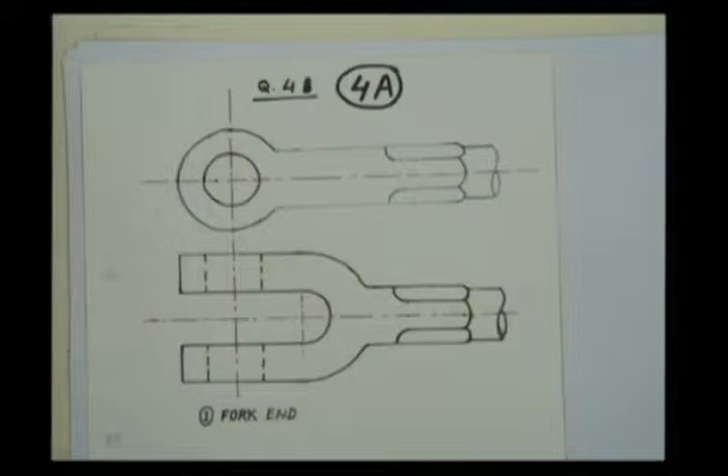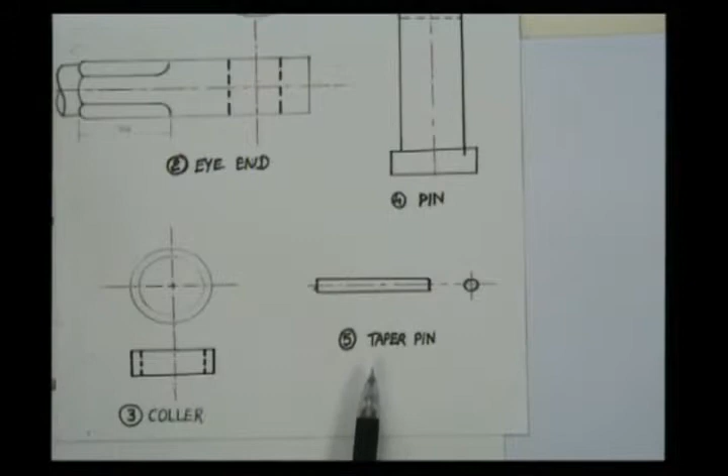...component, and this is the second component, that is the eye end, having two views, top view and front view. The fourth one is the pin, a pin which is inserted to join the fork end and eye end. Two views are there, front view and top view. Then another component is the collar and taper pin. The taper pin is inserted to hold the pin inside to connect the two ends.

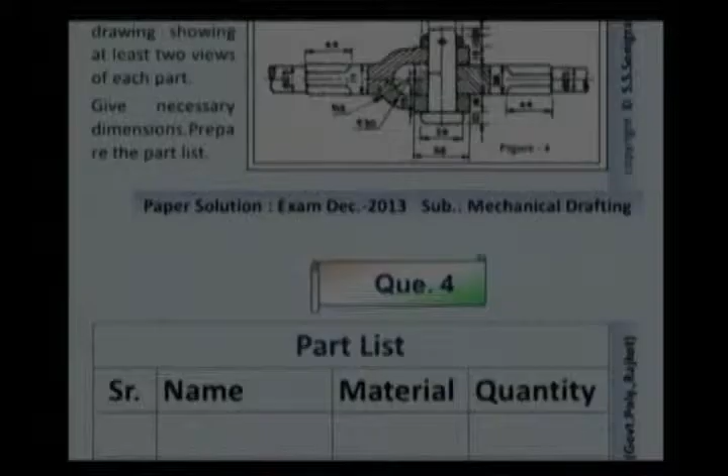So these are the solution. These are views of the given assembly drawing, the details of the assembly drawing. Then it is said that we have to prepare a part list. So prepare a part list like this. First is the serial number, then name, material and quantity.

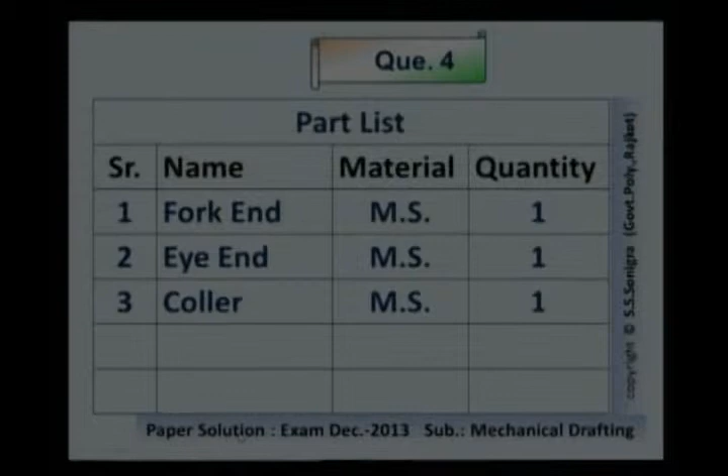The first is a fork end. The material is mild steel or MS and quantity 1. Second is eye end, mild steel, quantity is 1. Third is the collar, mild steel and quantity is 1. Fourth is the pin, MS 1. And fifth one is taper pin, mild steel, having 1 in the quantity. So that is the solution of question number 4.

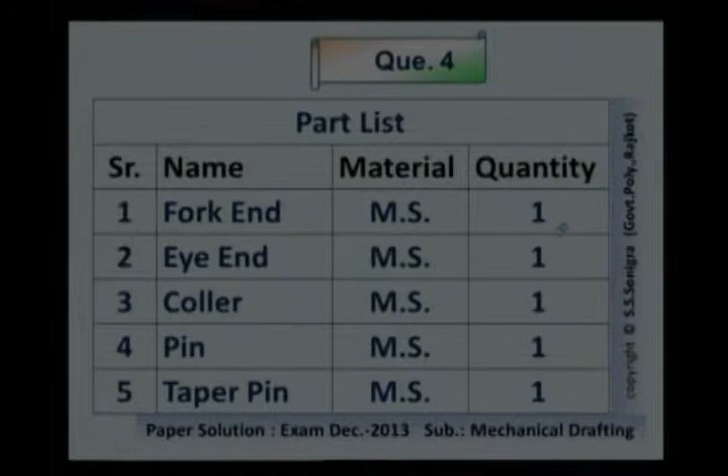Question number 5, the data is given like this, which belongs to the old syllabus, and we need not worry about those problems. Now some other examples.

Example number 5. A hexagonal prism, 50 mm sides and 60 mm height, resting on HP on its rectangular face. It is cut by a cutting plane inclined at 45 degrees to HP and bisecting the axis. Draw front view, sectional top view and true shape of the section.

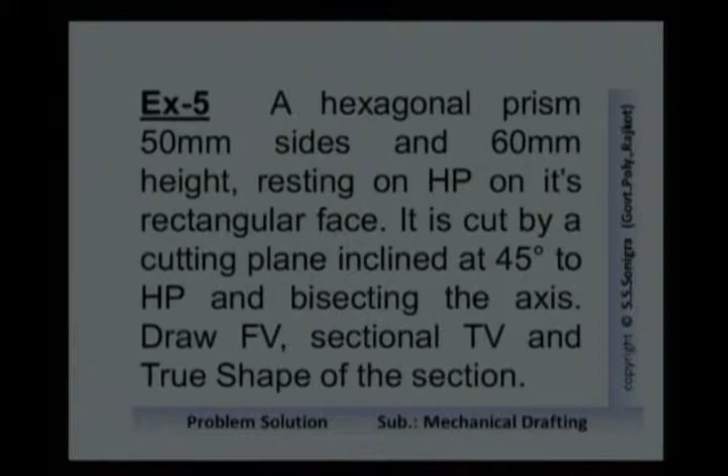So here a hexagonal prism is given to us, and as we know, for a hexagonal prism, its top view is a hexagon and its front view is a rectangle. This is the hexagonal prism given to us, having two parameters. One is the side length of the base hexagon and another is the height, which is given here as 60 mm, and the side length is 50 mm.

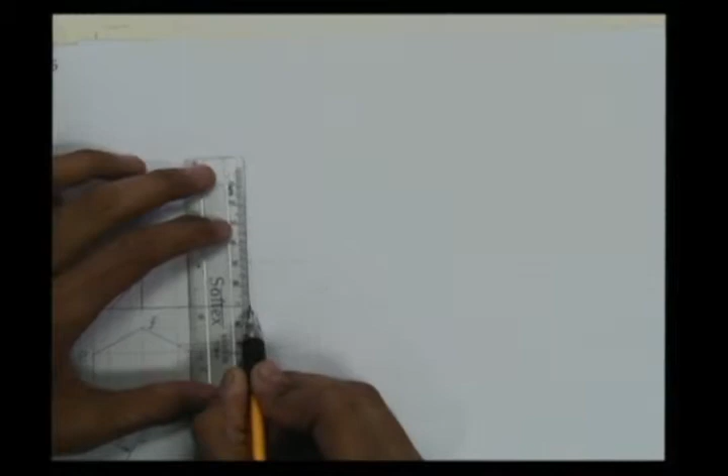So let me draw the solution of this problem over here. So tilt this front view as shown, as we discussed, like this, or redraw its front view such that it lies on its rectangular face on XY line. You can name the points here A, B, C, D, E, F. Insert the dimension HEX 50 or hexagon 50 mm sides.

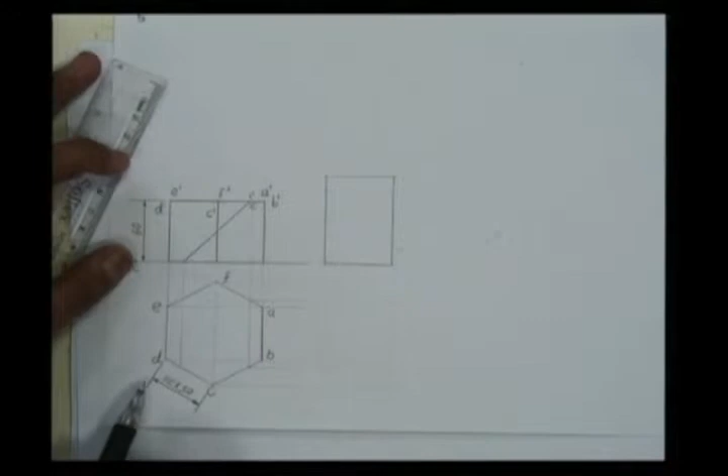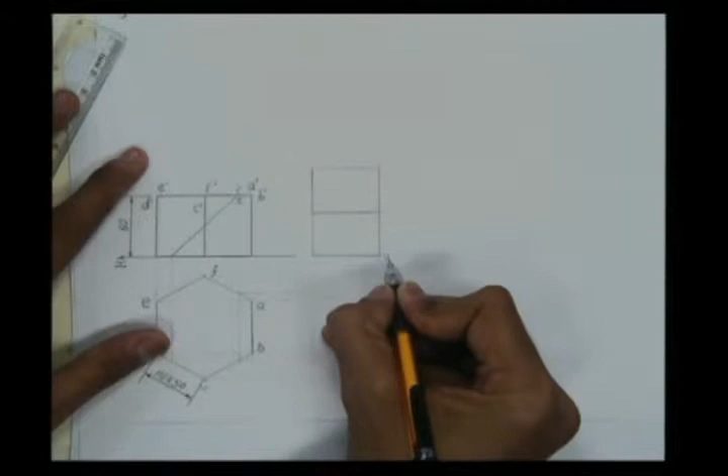Height is 60 mm. A dash, B dash, C dash, D dash, E dash and F dash are the points in the front view. We have tilted this front view in this way. So transfer all the points either by taking arc or measuring the distance from front view, and name the points. A dash, B dash is here, C dash, here will be D dash, E dash and F dash. So all these points are transferred over here. We have tilted this and put it over here.

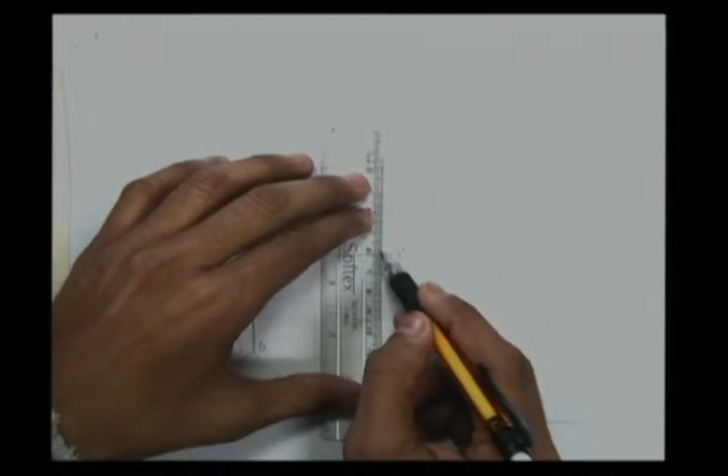Now draw its top view. So for that, let me take projection from its front view. So draw straight vertical lines from A, B, C, D, and from base also, like this. Now from A, draw straight horizontal line. That will cut vertical line from point A dash at this point. Here is point A, or A1 to differentiate from top view.

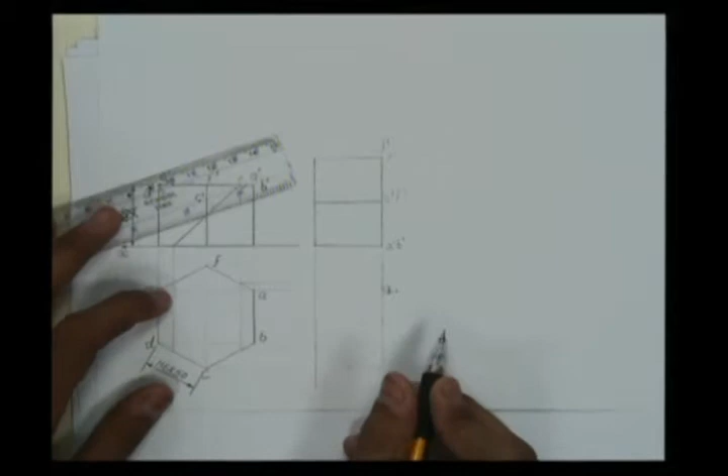Vertical line from point B dash, horizontal line from point B. So point B would be here, or you can write B1. Point C is here, so horizontal line from point C, vertical line from point C dash. So here is point C1. Similarly D and D, so here is point D1, here is point E1, F and F. So here is point F1.

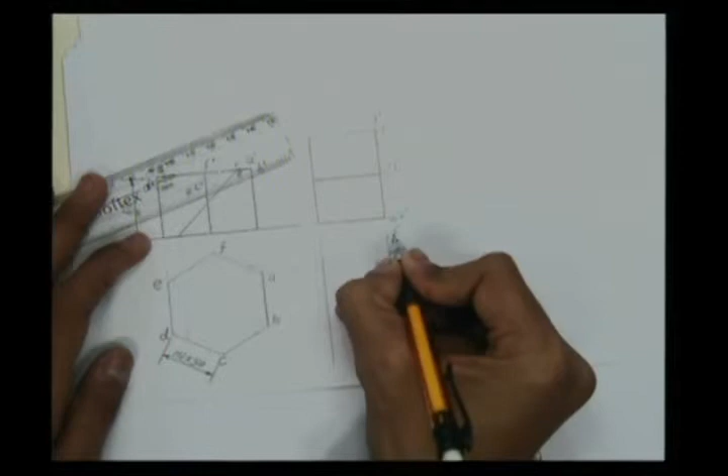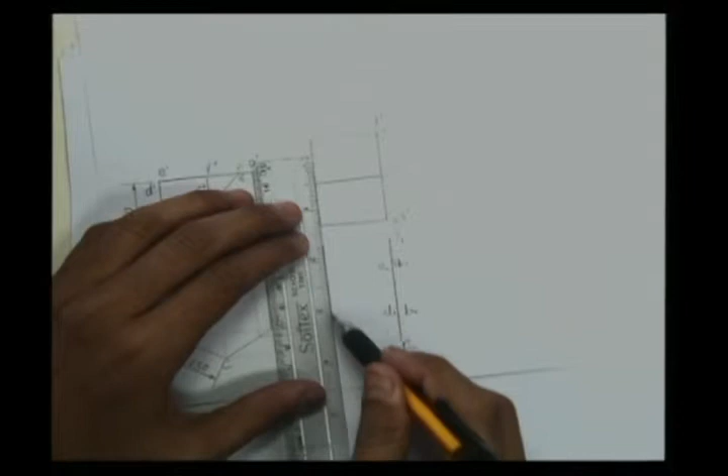Similar points on this side, on the base. This is the base, and similarly points on base would be here. You can name those points 1, 2, 3, 4, or A, B, C, D, as per convenience. And join all these points with a straight line, because it's a prism and no arc is there. So this is the top view of the given prism for the given situation. It is lying on one of its rectangular faces,

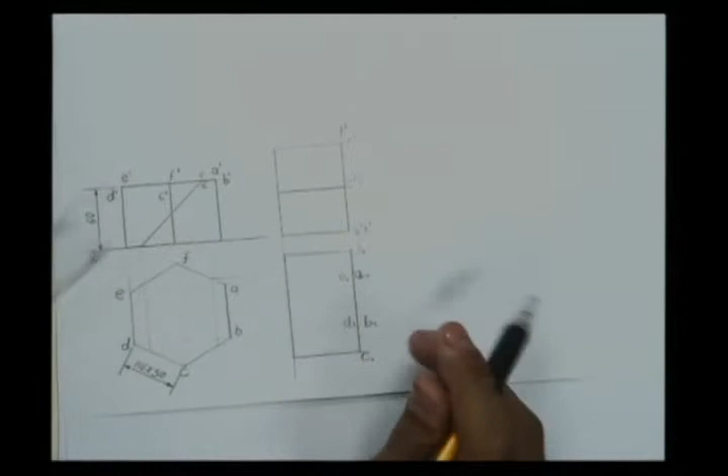and these edges would appear. Now here it is given that it is cut by a cutting plane which makes an angle of 45 degree with HP and bisects the axis. This is the axis. To bisect means to divide into two equal parts. So pick a point over here, and from that point draw a cutting plane line like this. This is the cutting plane line. So this is the cut portion, and above this cut portion you draw a cutting plane line like this: long dash, two small dash, long dash, two small dash, like this.

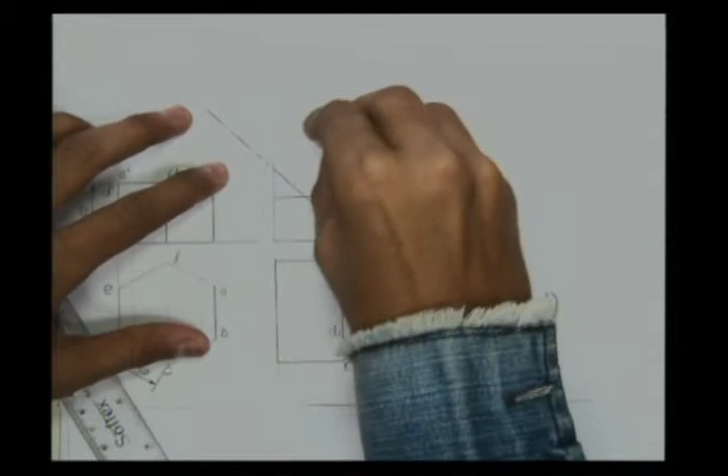This is the cutting plane line which is given to us. This portion is cut, and this upper portion is to be removed. This is the removed portion, and this prism is cut from this side. So how should its top view appear? For that, let me transfer the points from its front view to top view. So transfer this cutting plane in its front view over here.

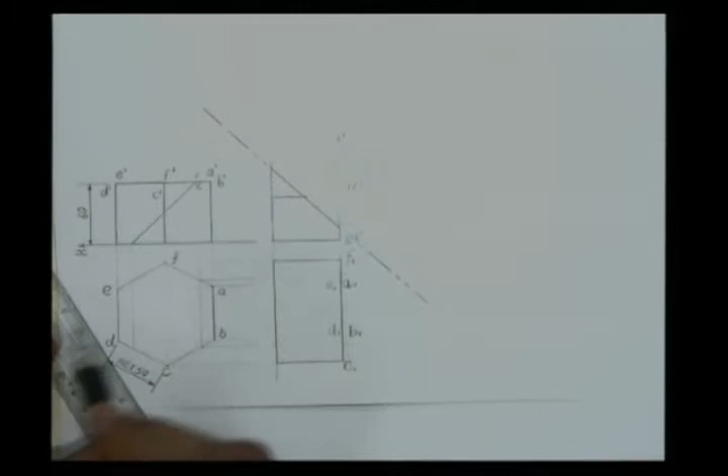This is the cutting plane, and from that point, we have to find out the true position of this point in its top view. So for that, transfer this point to here by measuring this distance. From this point, say 1 dash and 2 dash, draw straight vertical line. So this is true length AF.

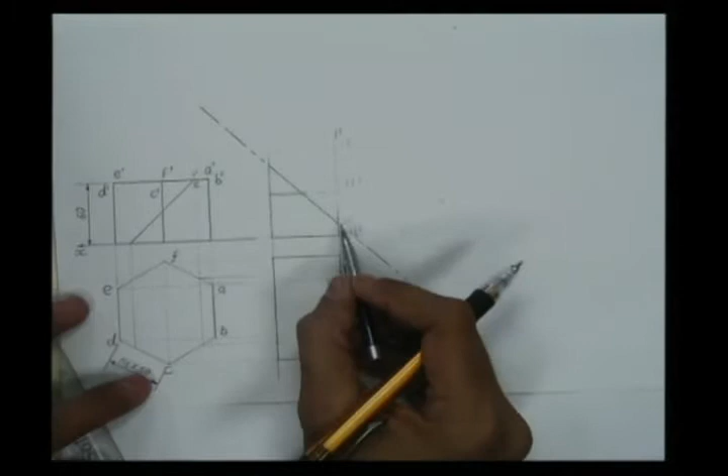And this is the true position of that point. From that point, draw a straight horizontal line that will cut AF at one point somewhere here. So this is our point number 1. Similarly, point number 2 is here. So transfer that point over here and draw a vertical line. From this point, it will cut BC at this point. So that is the true position of point number 2. From this point, draw a straight horizontal line that will cut B1 C1 at point number 2 somewhere here. So that is the true position of point number 2.

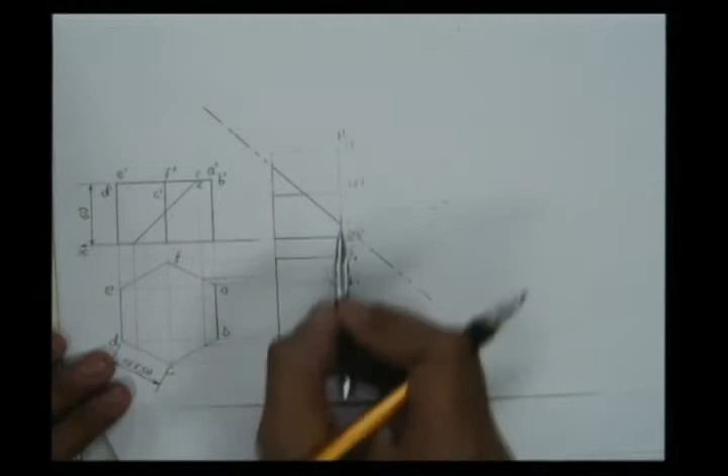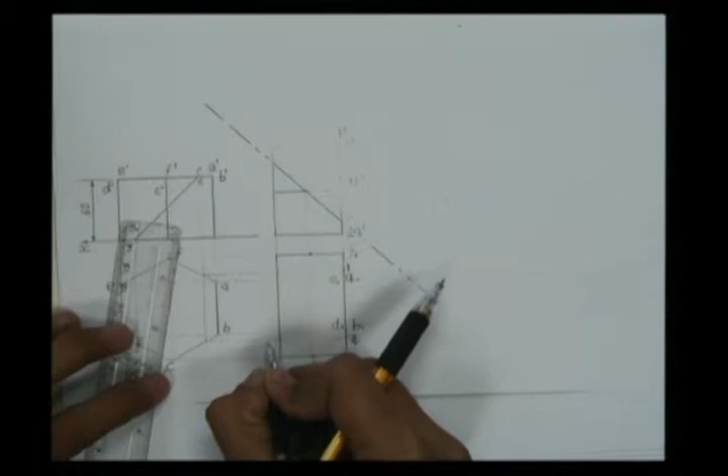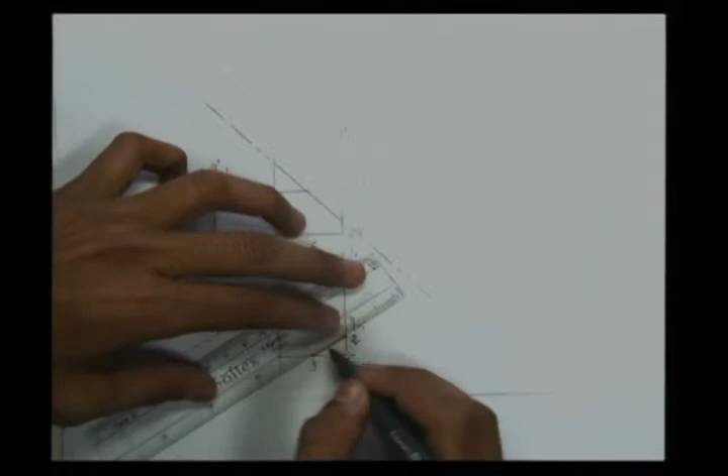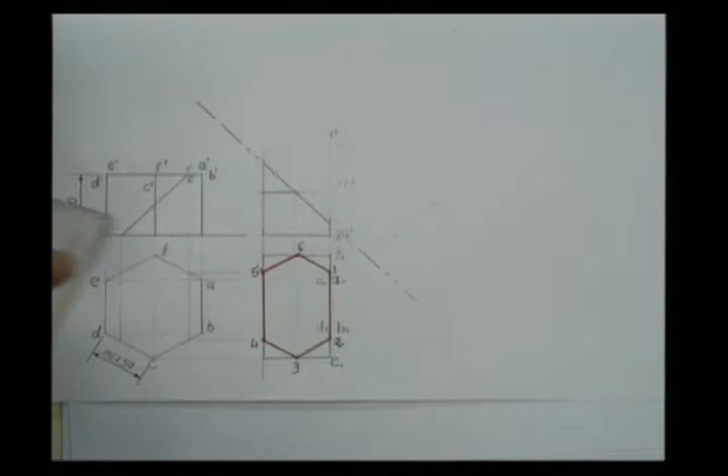So it would appear like this, and this is the sectional top view of the given hexagonal prism for the given cutting plane. As it's a sectional view, we have to draw section lines which make an angle of 45 degrees with the XY line like this. It's just like an irregular hexagon. It's not a regular hexagon because all side lengths are not equal.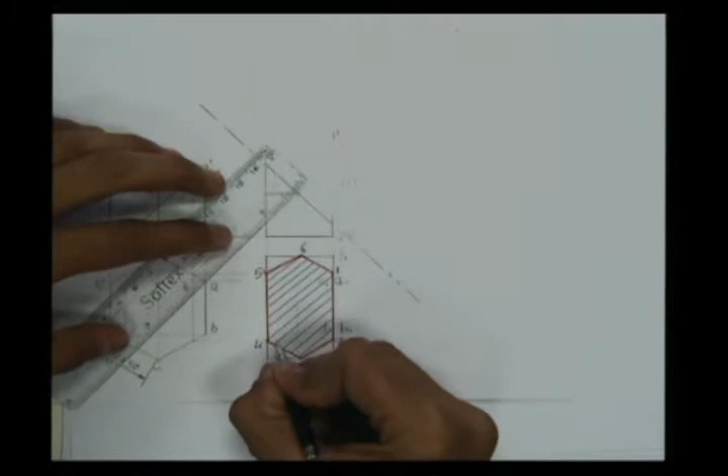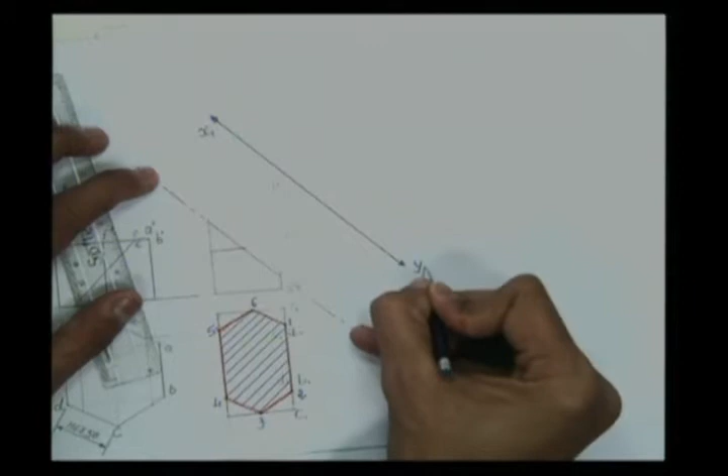Now we have to draw its true shape. The sectional top view is drawn. To draw its true shape, draw a line parallel to this cutting plane somewhere here, meaning that line will also make an angle of 45 degrees with the XY line. It's an auxiliary plane line; we can name it X1 Y1 or X dash Y dash, whatever name is convenient to you. It could be given, but XY should be there.

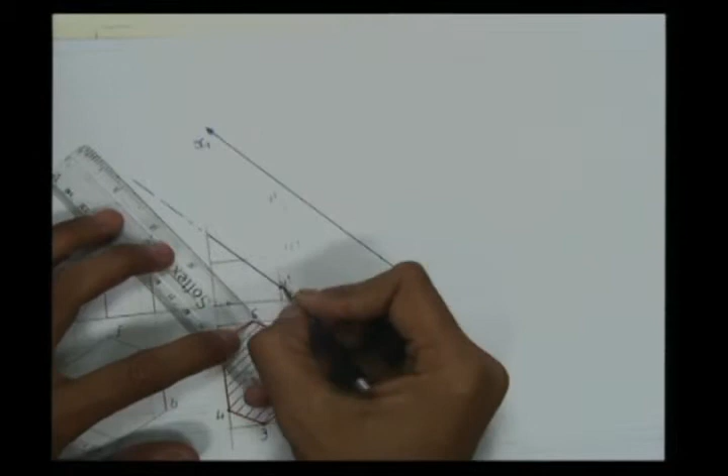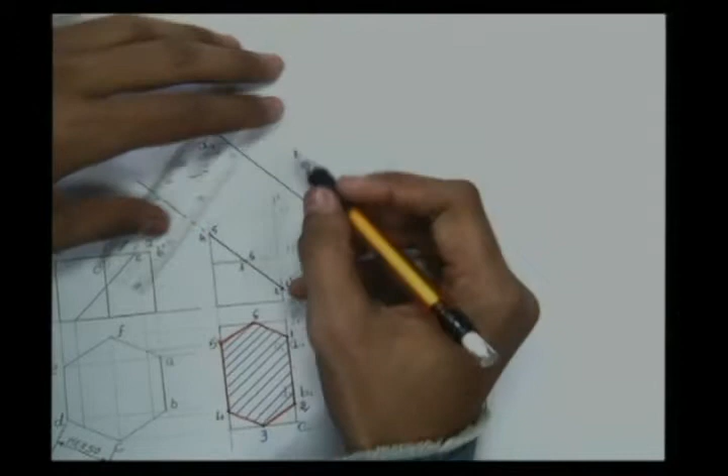Our points are over here, 1 to 6: point number 1, point number 2, point number 3, 4, 5, and here is point number 6. From all these 6 points, draw lines at 90 degrees to the cutting plane, perpendicular to it, like this. This angle is 90 degrees. Then measure the distance of these points in the top view from the XY line.

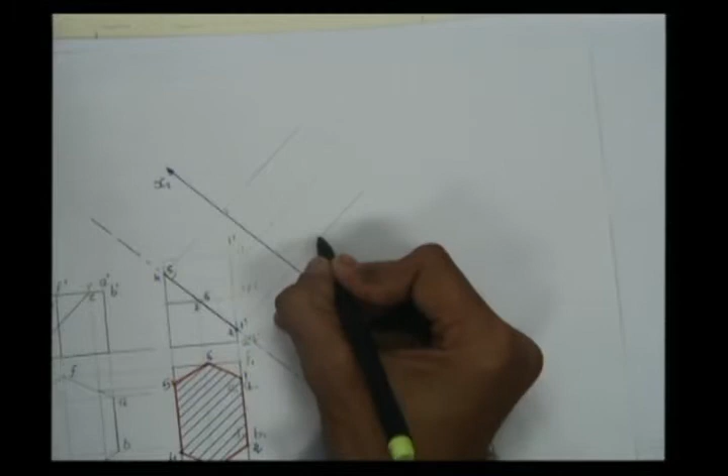Suppose point number 1 is here. Measure the distance of point number 1 from the XY line, put it over here, and cut an arc. So here is point number 1. Similarly, measure the distance of point 2 from the XY line and cut it over here from X dash. So that is point P2, or point number 2.

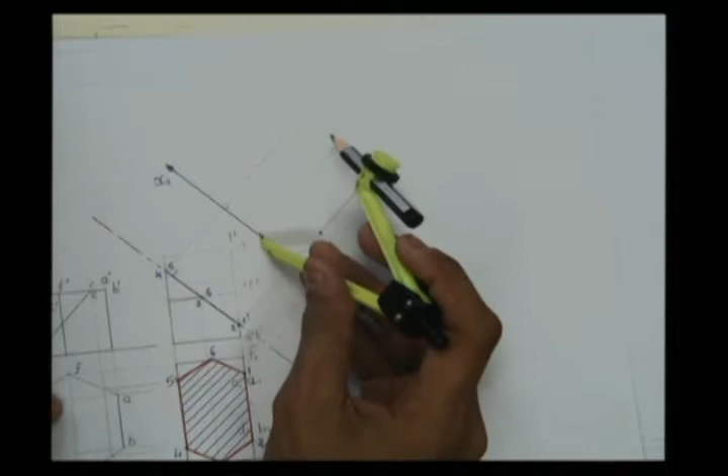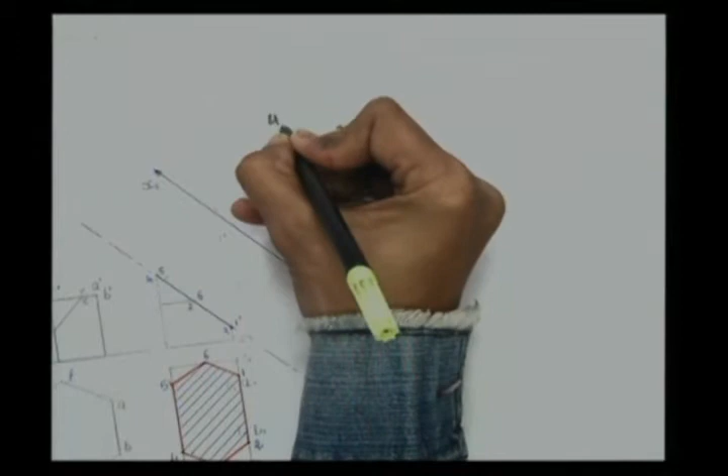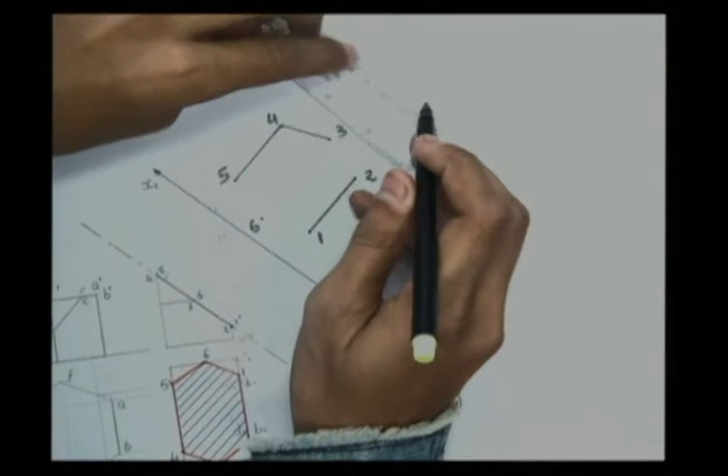Similarly, measure point number 3. Measure this distance and cut it over here. So point number 3 is here; name it point number 3. So here are points 1, 2, 3. Similarly, point number 4 would come here, point number 5 here, and point number 6 here. Join these 6 points with straight lines, because it's a prism, so all the lines would be straight. It would appear like this, and that is the true shape of the given cut portion.

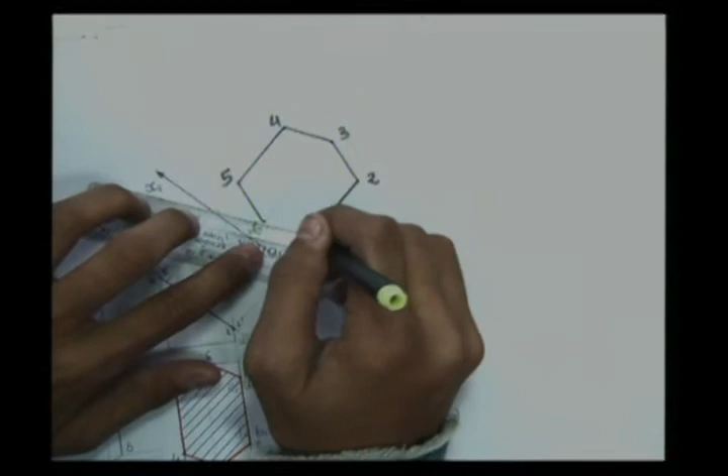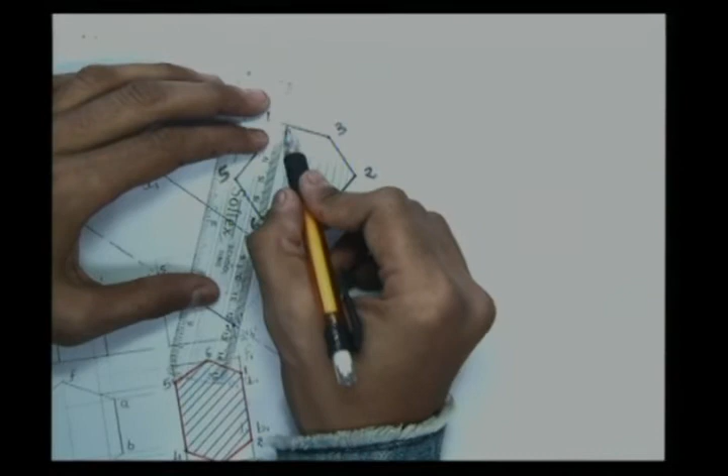This is the true shape because we are looking perpendicular to its surface. Whenever we look at 90 degrees, perpendicular to any surface, we can visualize its true shape. As it's a true shape, you have to draw section lines inside here like this, at 45 degrees to the reference line of this drawing. You can write the name of each view: this is the true shape, this is the sectional top view, and this is the front view.

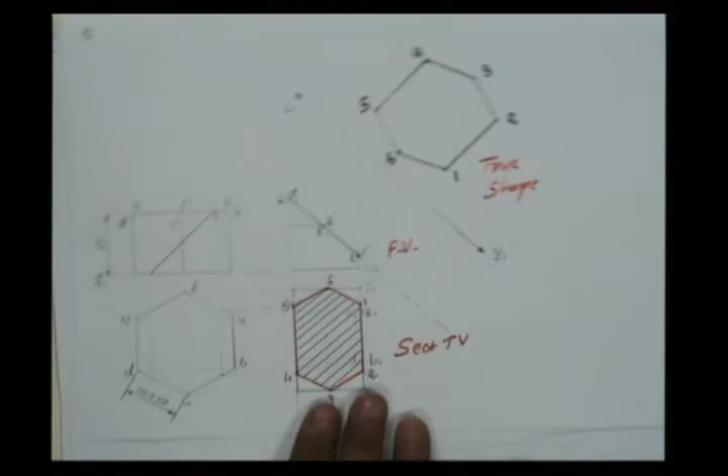This problem is asked for 7 marks, and this is the solution we have drawn. Front view, top view, insert the dimensions: height is 60, hexagon 50. It's a sectional top view, a front view, and the true shape of the section. So today we finished the solutions of all the questions of the December 2013 examination, and we will continue with more examples and exercises in the coming sessions.